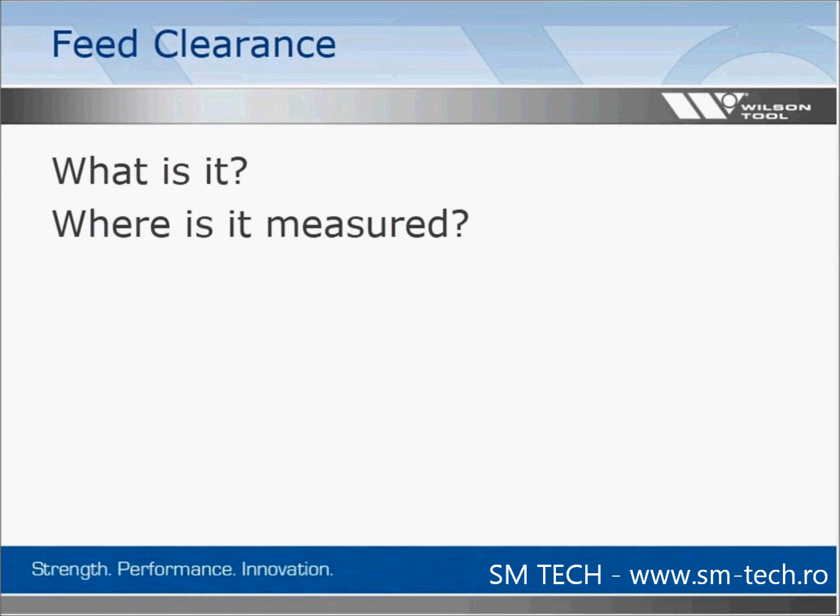Feed clearance, the place where forms happen. For a number of you, that will put an image in your head. For others, you're going to learn what that image would be if you were able to make the transition. Feed clearance, what is it? Where is it measured? And what's its role in production planning? That's what we'll be discussing today.

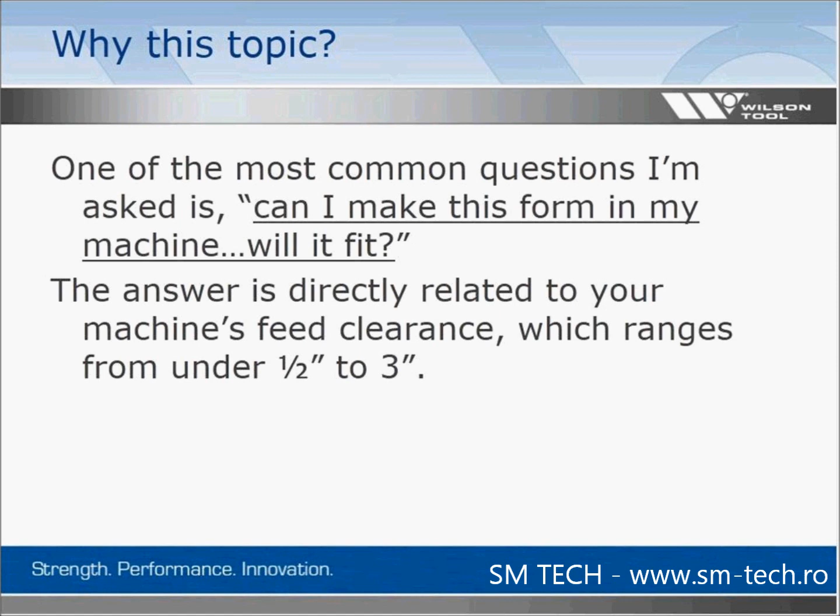But first, why this topic? One of the most common questions I'm asked is, can I make this form in my machine? Will it fit? And to understand if it'll fit, we have to understand what feed clearance is. These feed clearances range anywhere from under half an inch to 3 inches, so different machines are going to have much greater abilities than others. But to answer the question, we need to know what this is.

Understanding feed clearance is also going to give you an ability to make decisions that affect your quotes and how fast you can do a quote. If you don't have to contact someone at Wilson Tool for a question like this, it's just going to improve your quote turnaround time.

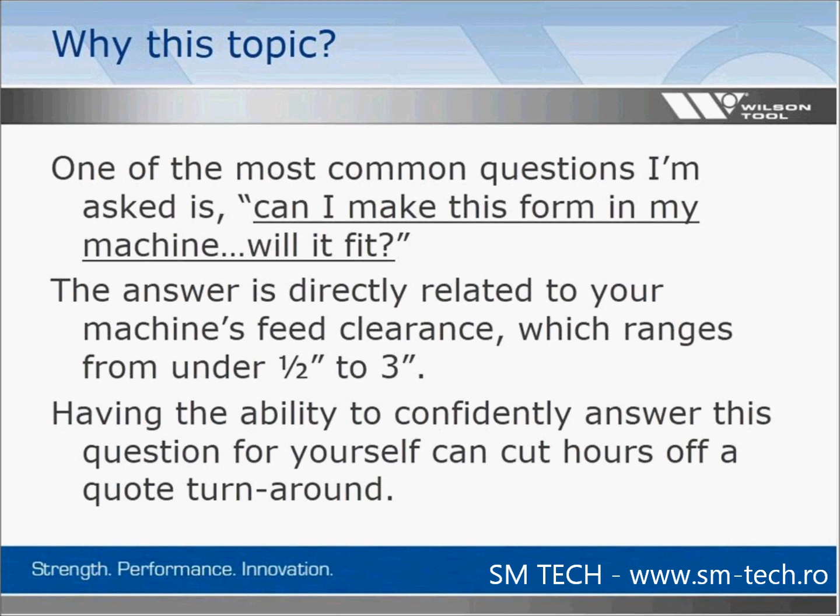So feed clearance, what is it? It's the machine's allowable workspace. So it's the area in which your sheet and the forms are created and travel about.

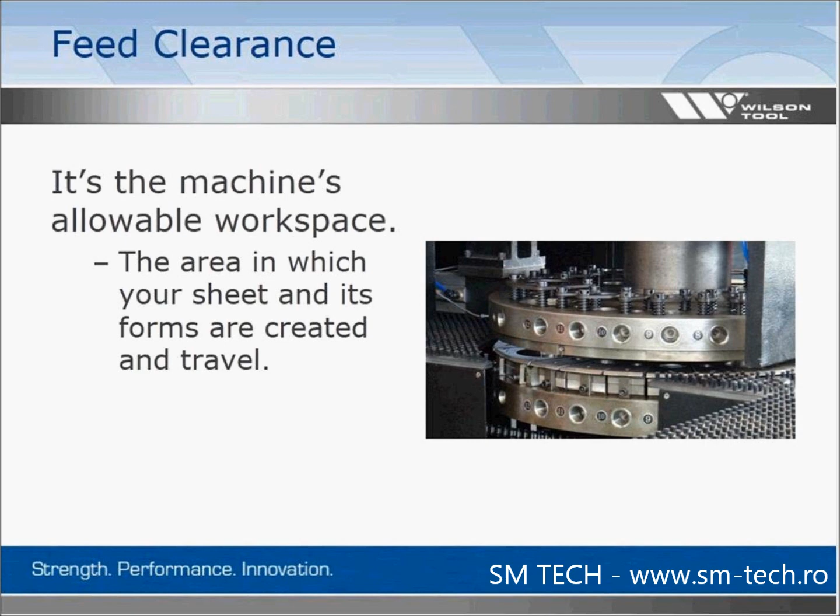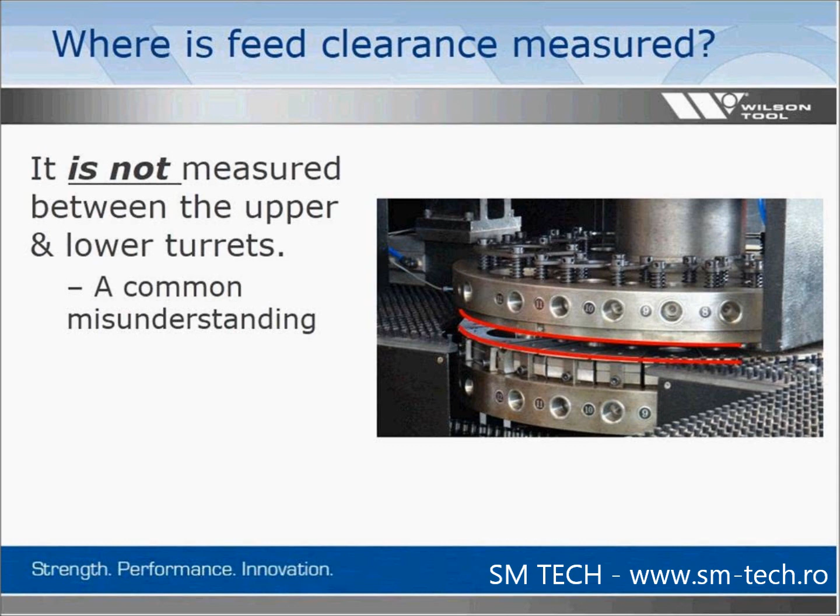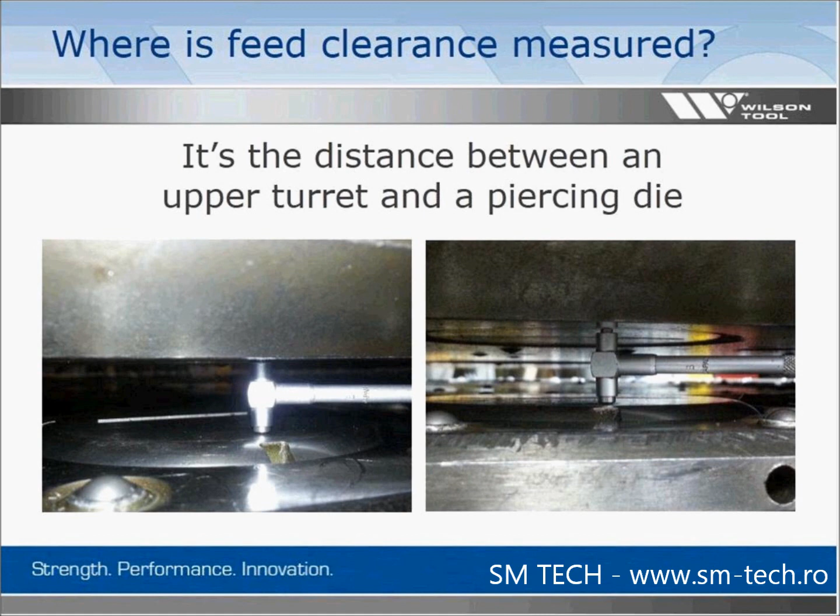Where is it measured? Well, it's not measured between the upper and lower turrets. That's a common misunderstanding. Right now you should see some red lines flashing about. It's really not there, because on this next slide, we'll see how a piercing die sits above the lower turret. So the distance we're talking about is from the top of a piercing die to the upper turret.

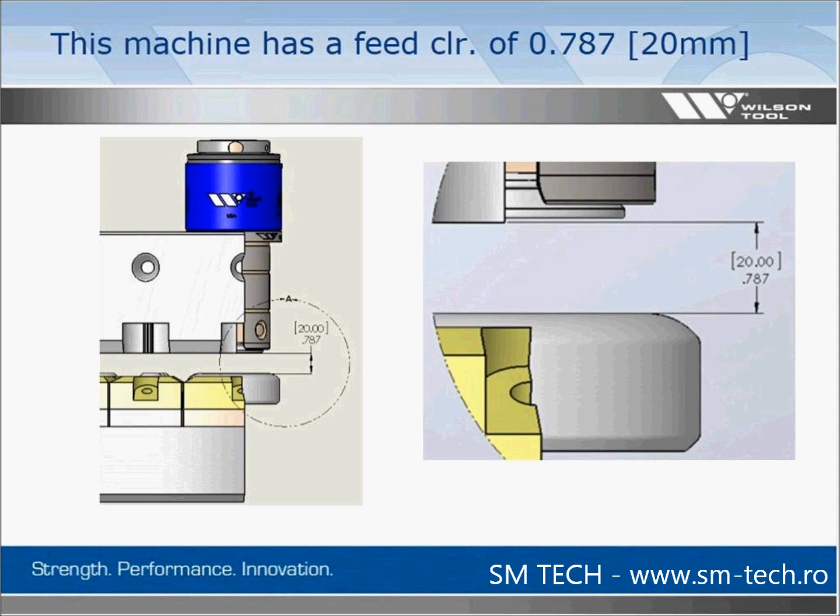This particular machine's feed clearance is .787 inches, or 20 millimeters. If you notice in the right-hand image, the stripper plate is slightly recessed into the machine. And that's why we don't measure to the upper tool, just the lower tool.

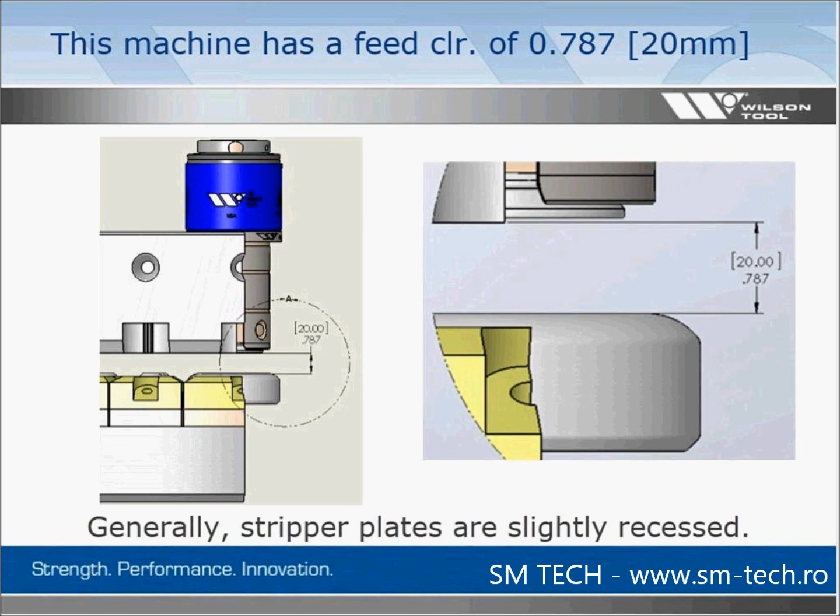So what's its role in production planning? It's used to check whether or not you can make a form in the punch press, right? We're answering that question: will this fit?

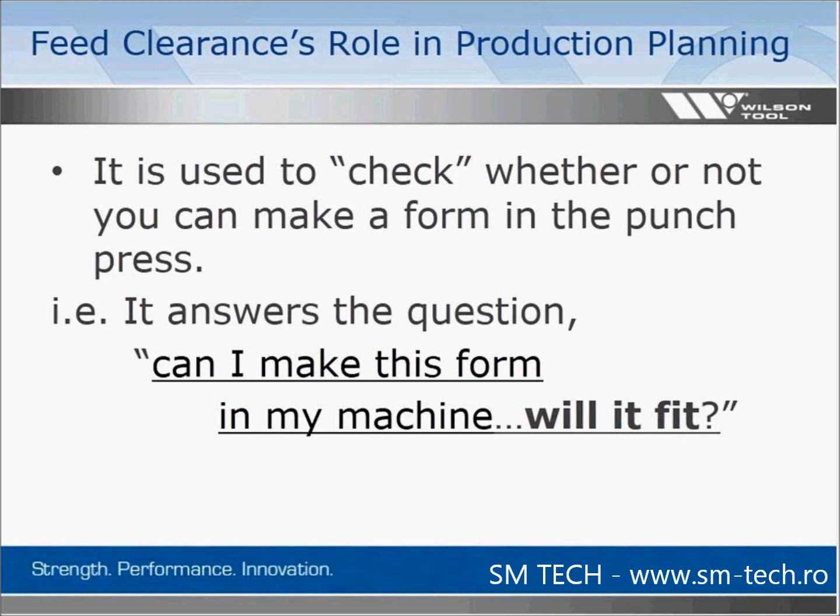So a feed clearance must accommodate the safety factor. We have that workspace, but we can never use all the workspace up, otherwise our sheet's going to run into the machine. Something bad can happen.

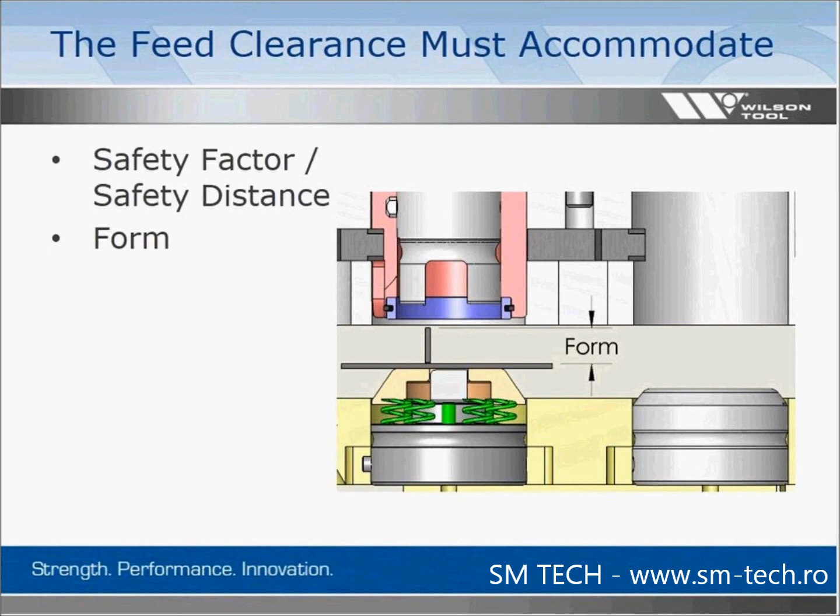We have to accommodate that form itself, sheet stock, and the taller die. When we're doing forms, we have to have taller dies, we call that add-on, that sit above the piercing die in order to make the form. Sometimes we have strippers that hang down because they're extra thick and they have to have relief for forms, side to side, center to center type information. So sometimes we have to account for that stripper as well.

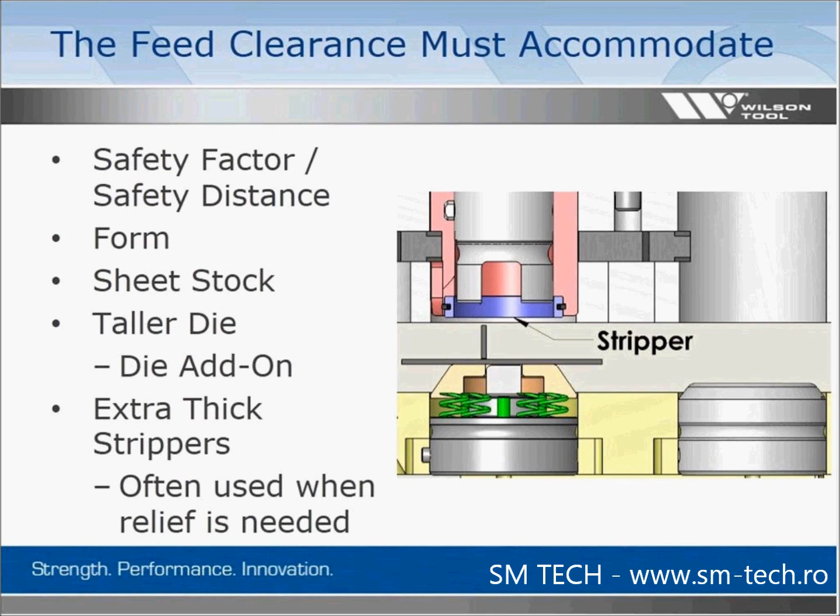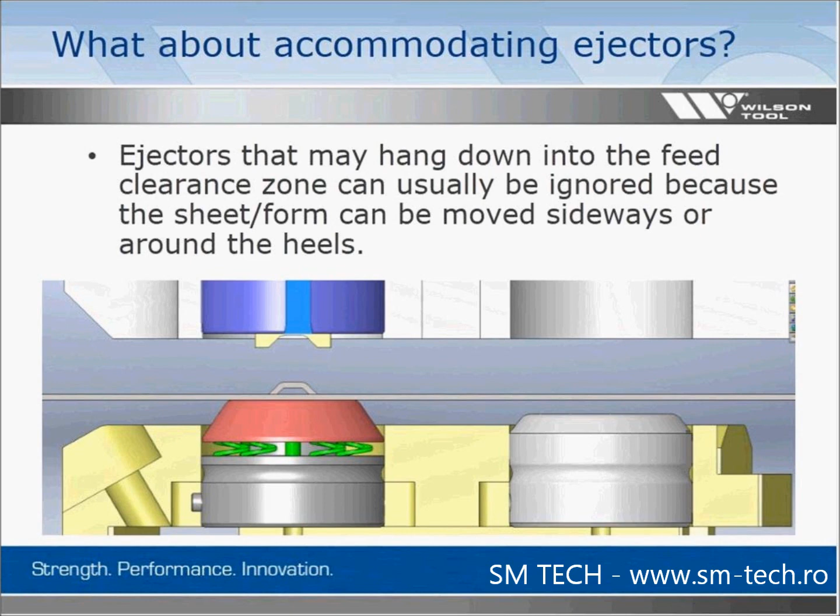Some people might be wondering why, or do we have to accommodate ejectors. In this picture, I'm showing how the upper ejector hangs down below the turret. Now, yes, it hangs below the turret, but from a practical standpoint, we can ignore that because the form can usually be removed from beneath the ejector by sliding in one particular direction or another. So to get the most out of your machine, sometimes you just have to program around some of the problems.

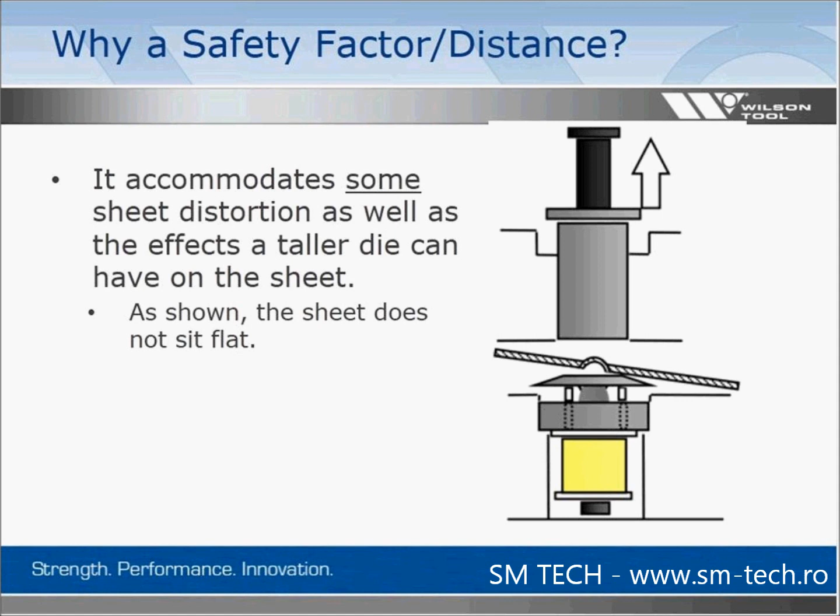Why is safety factor distance needed? As I alluded to, if we used up all the space, the sheet can hit the turret, bad things can happen. But sometimes the sheet just kind of bends. In this picture, you see how the sheet is kind of cocked, extremely exaggerated because it's a forming tool. So we have to account for that, give it a little extra safety space. And then there's just the overall sheet distortion. So we got to accommodate those sorts of things.

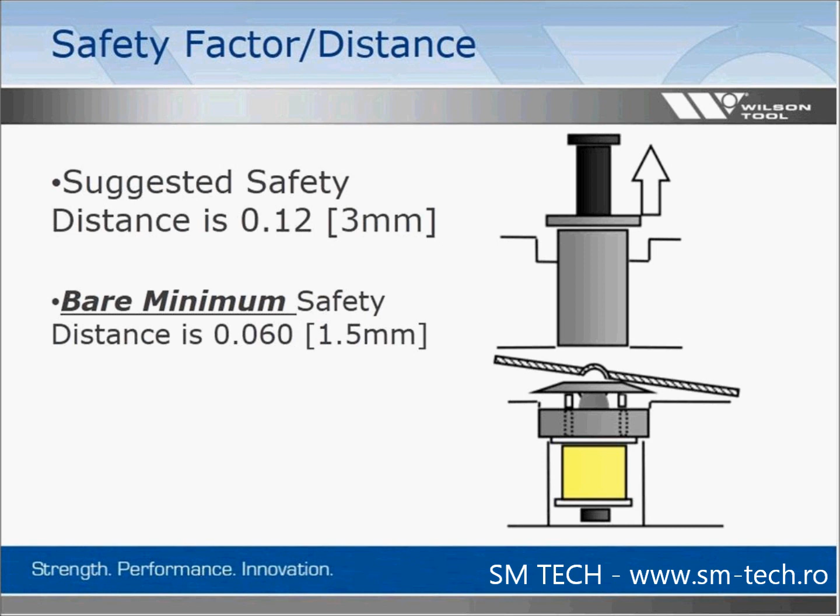The suggested safety distance, or safety factor, that I'm suggesting you use, because we are going to do a little math, is 0.12 inches or 3 millimeters. As you get more comfortable with your product and with making these calculations, and you find you're very successful and comfortable with your calculations being pretty accurate, you could cut that safety factor down to probably about 60 thou as a bare minimum.

Now, there are some special machine functions that overcome this problem with the sheet tilting. In a Finn Power machine, they call it a retractable die station. In a Trumpf machine, they call it an active die station. Or in an Amada machine, they call it the forming station or punch and forming station. There are many other manufacturers, and they all have similar functions.

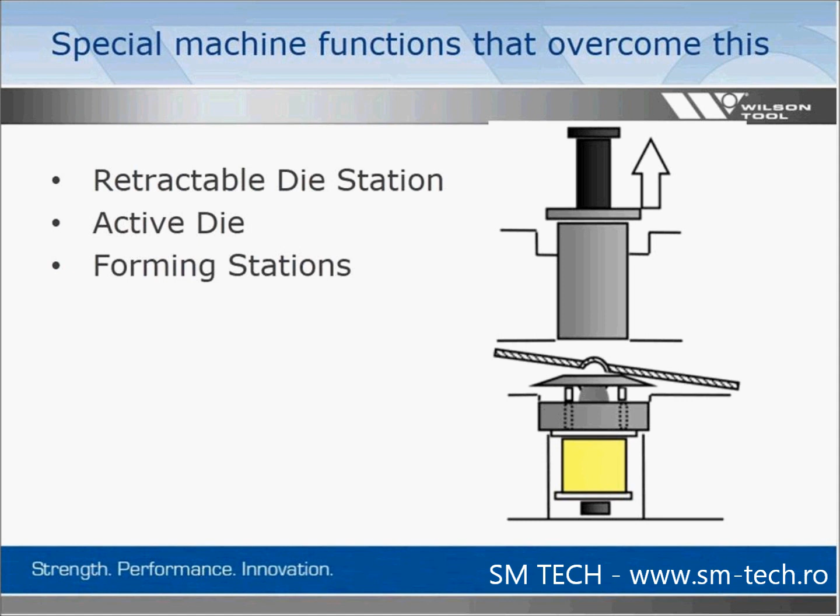So we're going to take a little sidebar to show you the value in these forming stations or retractable systems. The whole concept is to keep the sheet flat, so it doesn't tilt up when you're using a forming tool. In this image, we're seeing how the sheet is positioned above a forming tool, and it happens to be at the same location as a standard piercing die.

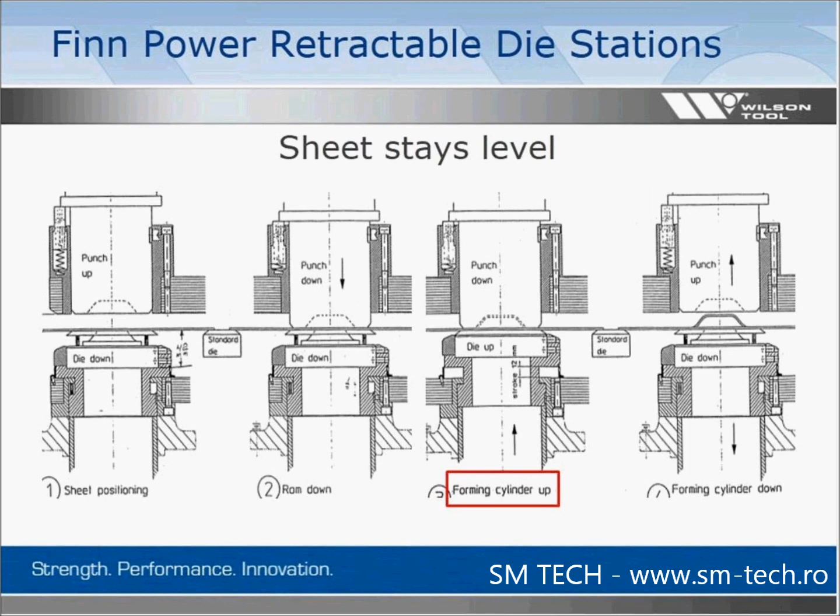So the machine's going to bring the upper punch down. The sheet didn't move anywhere. Next, the lower forming cylinder is going to move up, traveling the forming die upward into the punch. But notice how the sheet's not moving, it's not going anywhere. And then everything retracts. So you did all your forming with a flat, level sheet.

Trumpf's active die system is very similar, where they're going to bring the punch down, engage the sheet, and then lift that die system up, activating all the action in it, and then retract everything. The sheet stays flat.

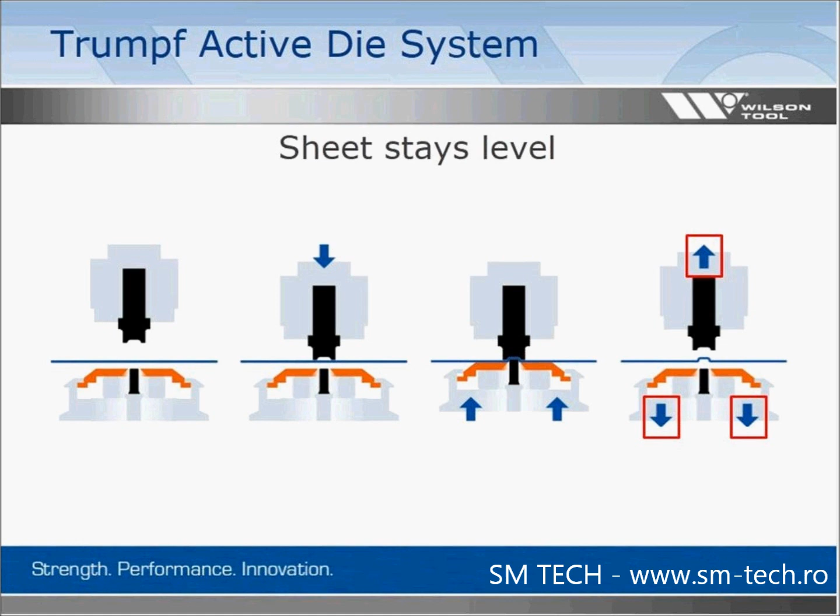The last one I have here is the Amada P and F. This one is different than the other two in that only the internal portion of the die moves, not the whole entire die assembly. In this case, we can bring our punch down, securely holding the sheet, with as much as 30 tons of pressure, where the other ones are just holding it with whatever spring pressure we allowed in the die assembly.

When the upward cylinder moves, we make our form, and then everything retracts. The sheet stays level in this case.

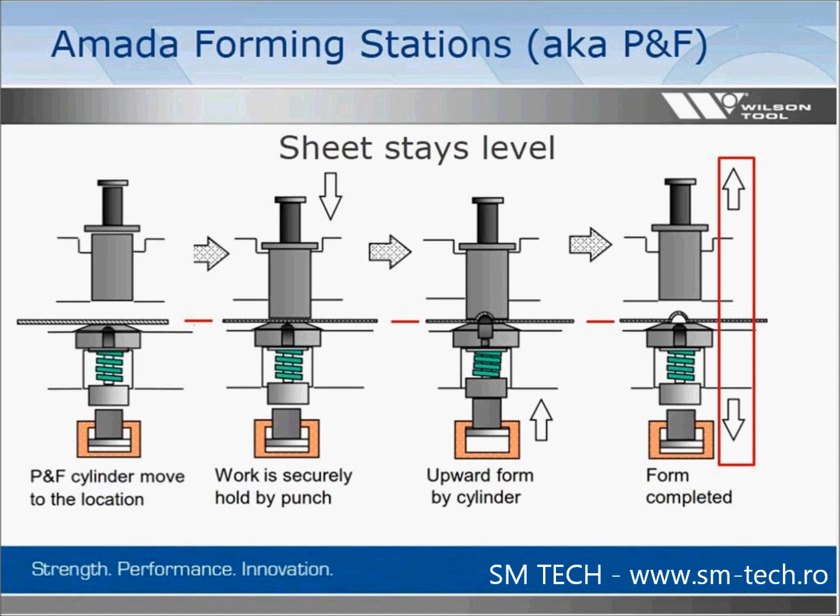I just encourage everybody, if you have these systems, you should investigate using them. You won't regret it, and the quality enhancement is something you can sell. We have customers who make nothing more than electrical knockouts, and with the Amada P&F system, they just make them better than everybody else. The quality is greatly enhanced.

So back to our topic, what's the role of feed clearance in production planning? Well, feed clearance needs to accommodate everything, right? We said the safety factor, form, sheet stock, taller die, and the extra thick stripper.

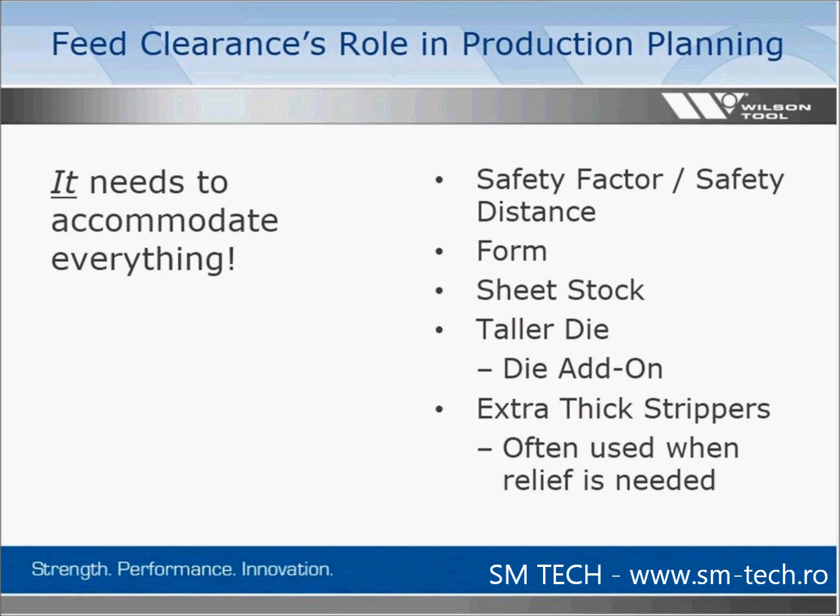So the taller die, that die add-on, let's just make sure everybody knows what I'm talking about. This picture shows you a forming tool on the left and a piercing tool on the right, and the add-on is how much taller that forming tool has to be to create a form.

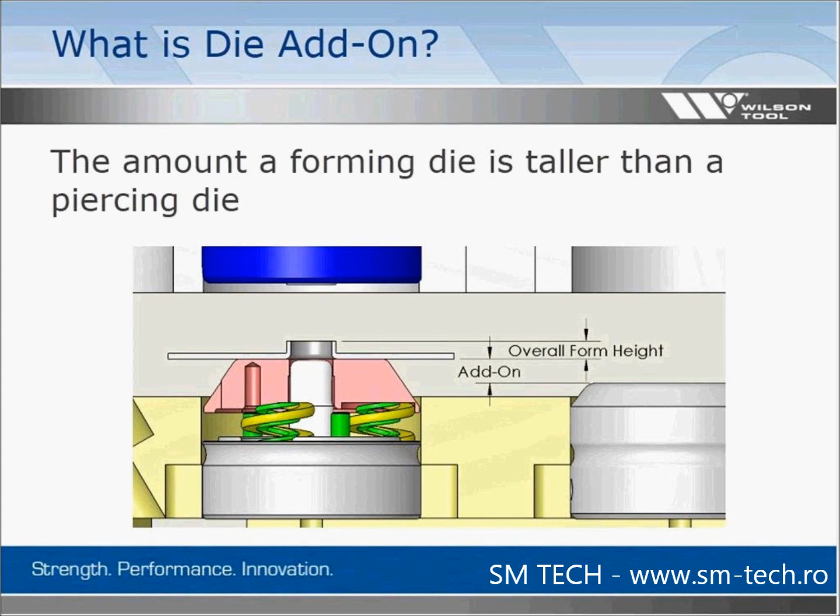So now, how do you know what the die add-on is? Most forms fall into 3 tool designs or categories, and that's directly related to the add-on. There's no standard verbiage or names for these types of forms, so I'm going to call them positive forms, pass-through forms, or wipe-up 90 forms.

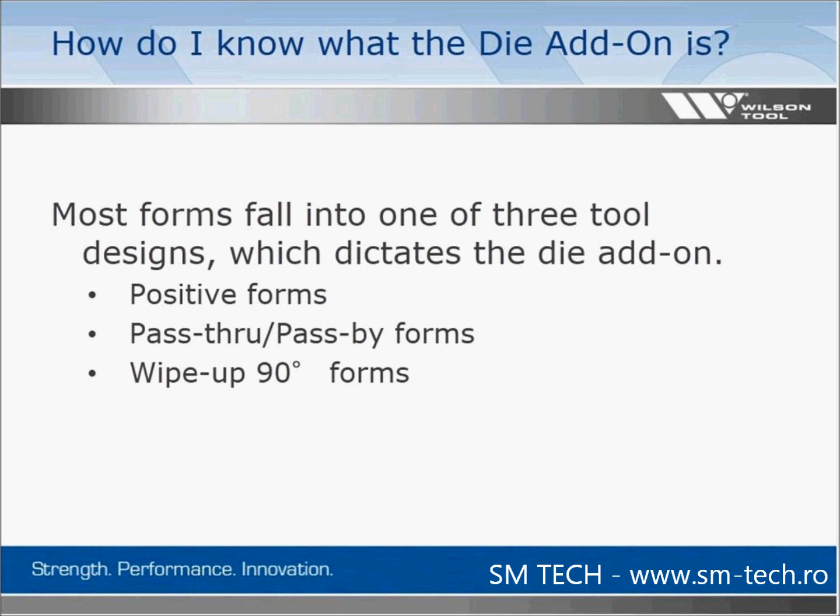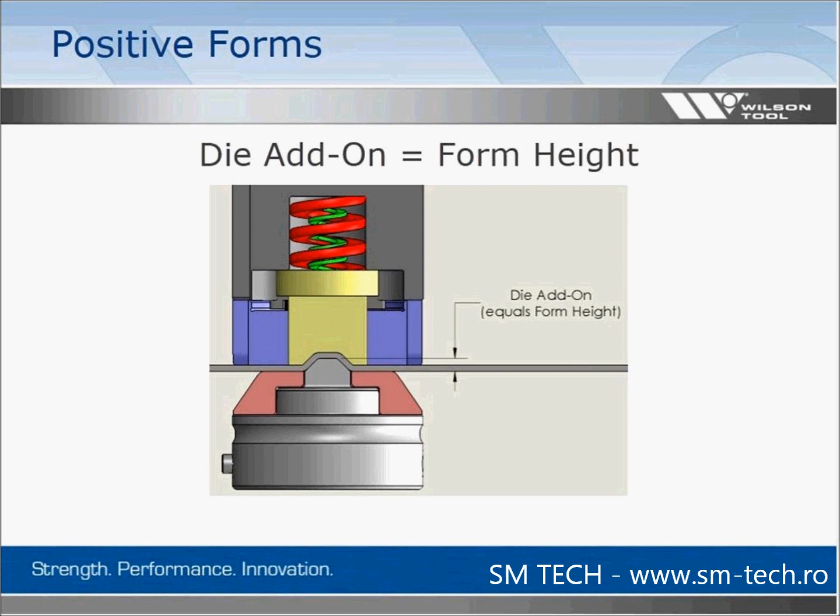Here I'm showing you a positive form. The die add-on equals the form height. It's a bridge, or it could be an emboss, where that die add-on and the form are identical. So it simplifies our math problem. The minimum feed clearance of a positive form is a safety factor plus 2 times our form height plus a material thickness. You can see with the graphic why an add-on equals a form height, so that's why we see 2 of them plus a material thickness. That's all we have to accommodate.

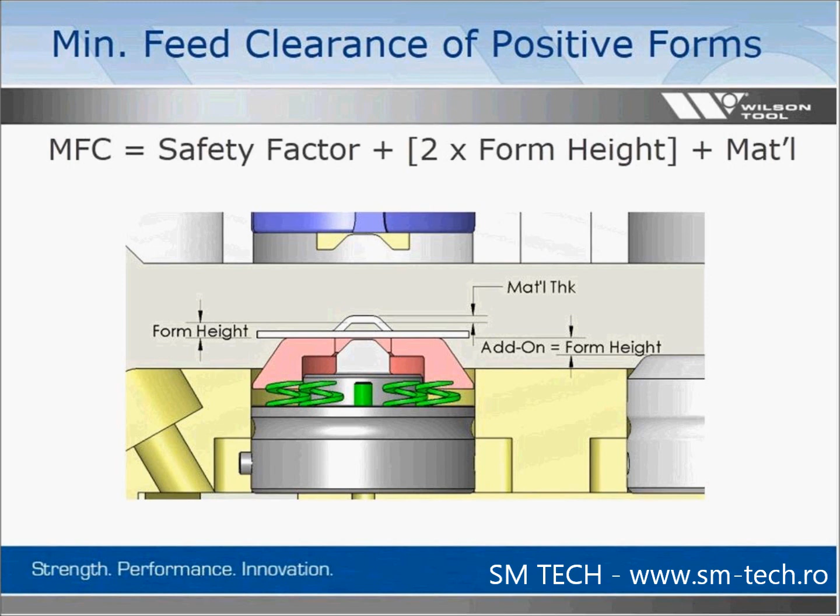Other positive forms, or the group of positive forms, are bridges, embosses, EKOs (electrical knockouts), dimples, half shears, lance forms where they're that up and over, louvers - that's most, rare cases we can shorten it, but for the most part you can count on a louver being a positive form - ribs, thread forms, wheel tools, those are all positive forms.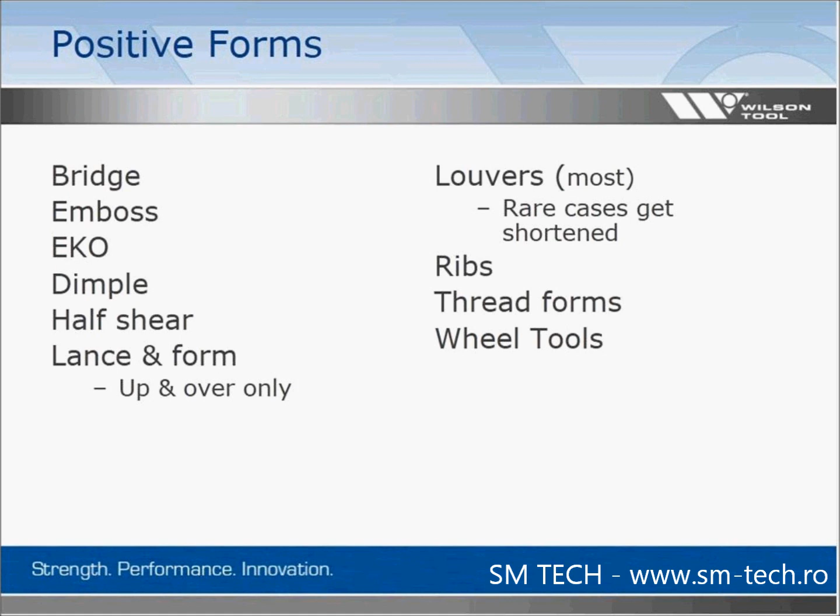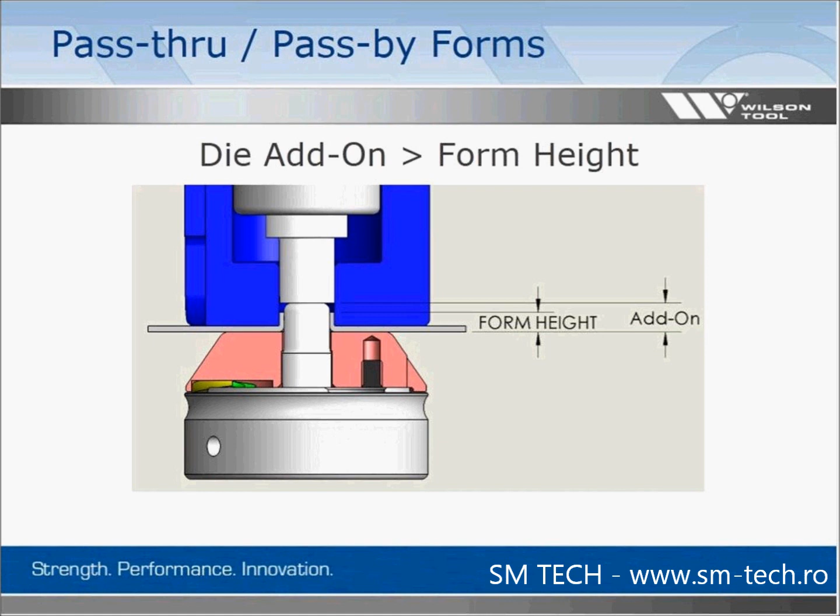Now, a pass-through form or pass-by is where the die add-on is going to be more than the form height, because in this case it's showing you an extrusion, and I have to shove the tool completely through the extrusion.

But using some rule of thumb, some common sense measures, we can identify that the radius on a tool should be approximately a material thickness. Sometimes a little bit more, sometimes a little bit less. But it's safe to say one material is going to be my radius. So if I do that, my die add-on becomes my form height plus a material.

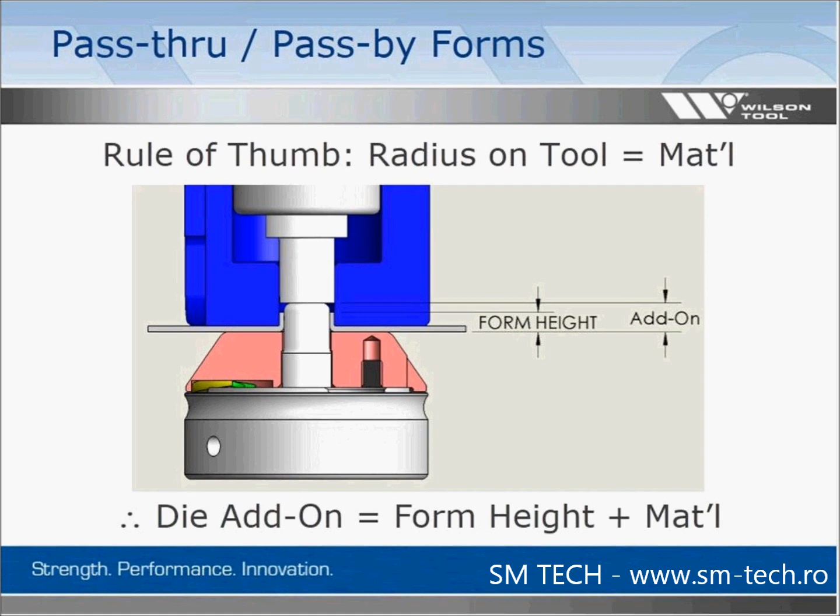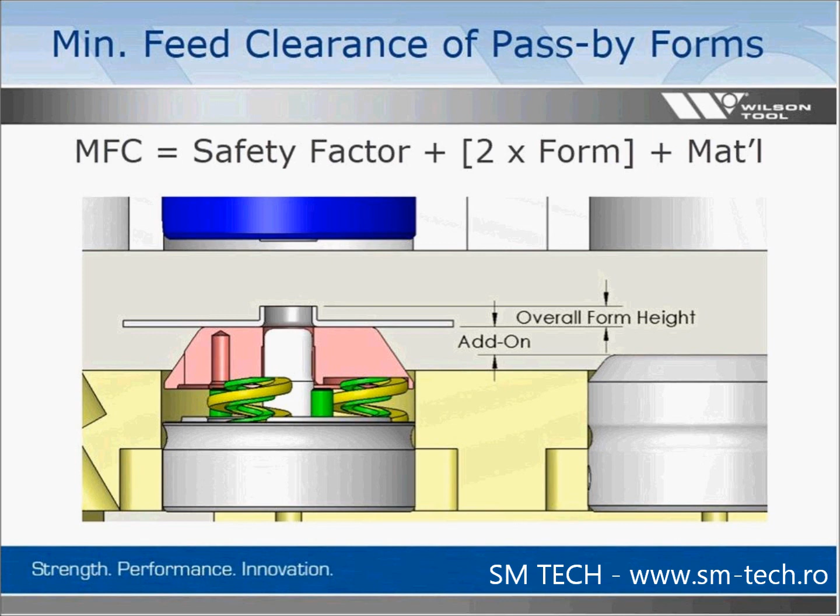And then to take that to what is our minimum feed clearance, it becomes that safety factor that we always want to use, plus 2 times the form, plus a material. So with a couple general rules of thumb and simple math, we can answer the questions.

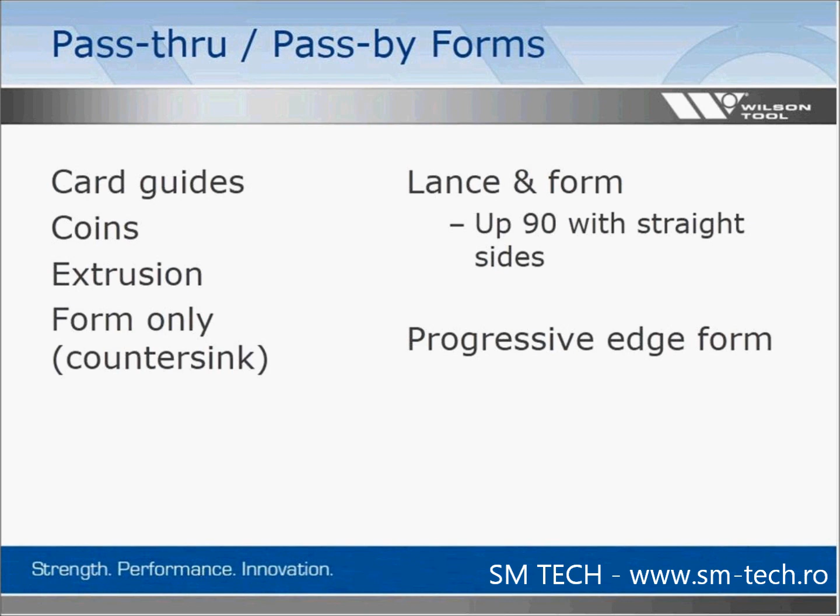A pass-through form would also include card guides, coining tools where we have a pilot, extrusions, form onlys or countersinks, a lance and form, up 90 with straight sides, progressive edge forms. I'm sure there's a couple that I missed.

Now, a wipe up 90 is a category by itself, because as you see, the die add-on can be much less than the form height. Since I'm not cutting the sheet and forming it, all I have to do is kick the form up. Doesn't require me to pass beyond it.

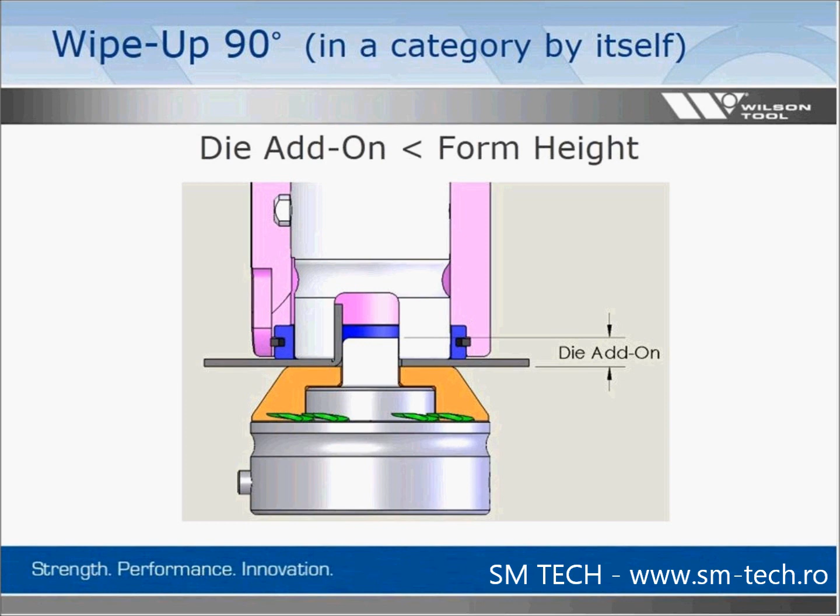Wipe up 90, we have that rule of thumb again on the die rad. The material thickness is fine. So what we have to accommodate here, we see is a material thickness. We have a bend radius on our punch, a material thickness of straight. We have to have something, make sure we wipe at 90 degrees. So we're going to use a material thickness of straight and a material thickness for that rad. So all those

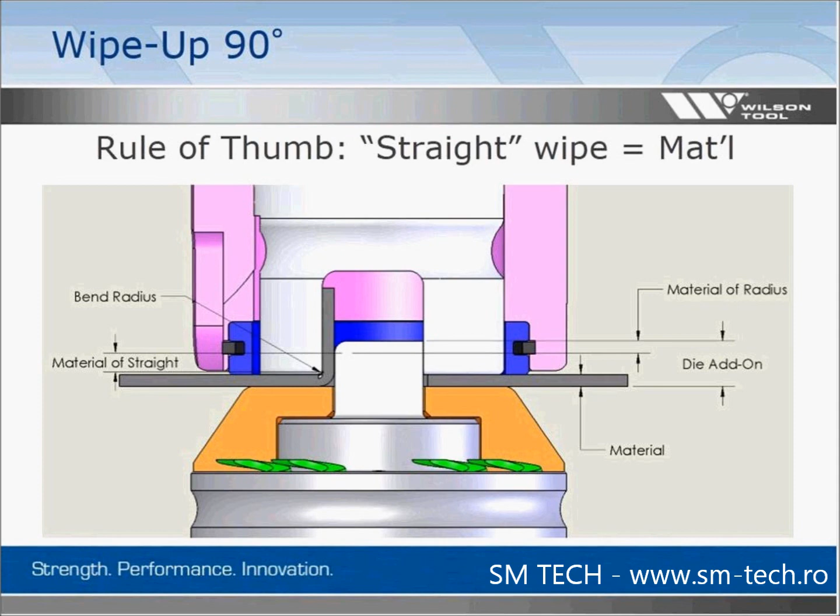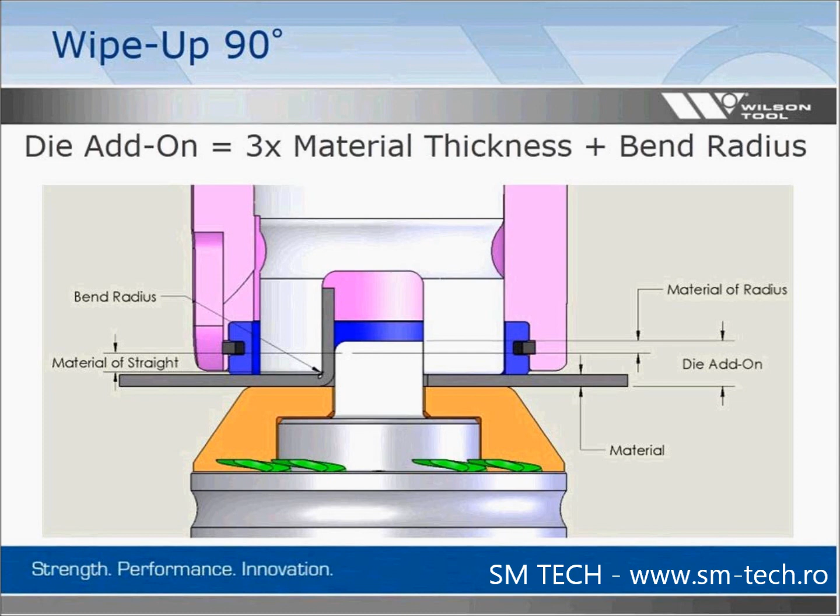create our die add-on. So what I didn't point out is the rule of thumb, straight is also material. So if we can relate everything to a material, it really simplifies the math formula. What's my die add-on? It's 3 times material thickness plus whatever the bend rad is on the punch. That's a variable that I can't put a rule of thumb on.

So our minimum feed clearance of a wipe up 90 degrees. It's going to be our safety factor, plus overall form height, plus 3 times material thickness, plus that bend radius.

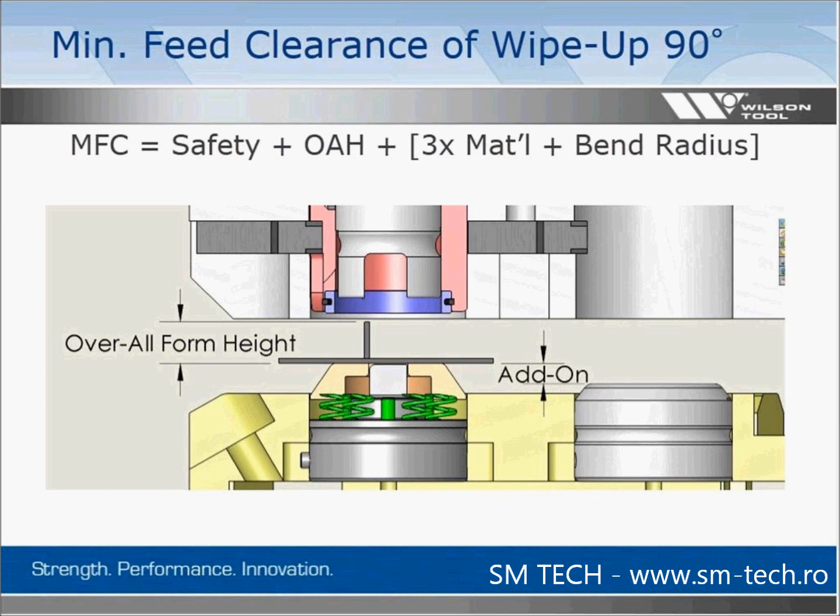So just making sure we're following the bouncing ball, if you will. I'm giving you a little math test. It's not going to be graded, so there'll be no embarrassment.

So my question to you is, what's the minimum feed clearance of this bridge? Now remember, it's a positive form. I have a form height of 130. My material thickness is 60. So remember, we have to account for a safety factor. And because it's a positive form, it's 2 times the form height plus a material.

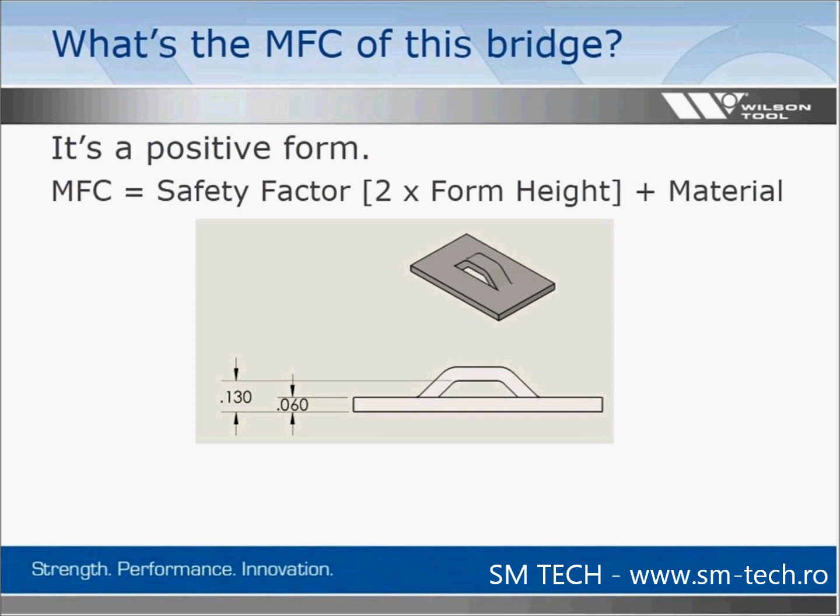So to create the bridge in front of you, it requires a machine that has 0.44 feed clearance or more. And I do know machines on the market that can't accommodate this.

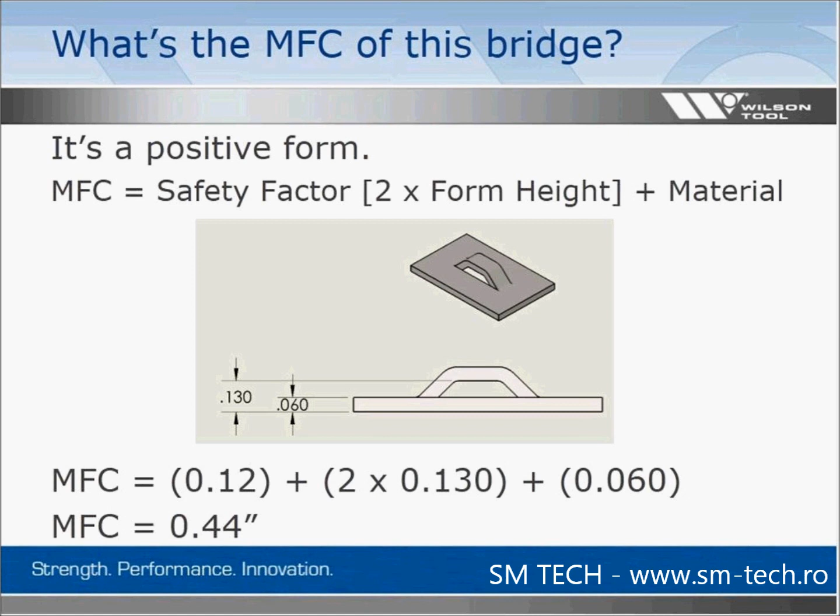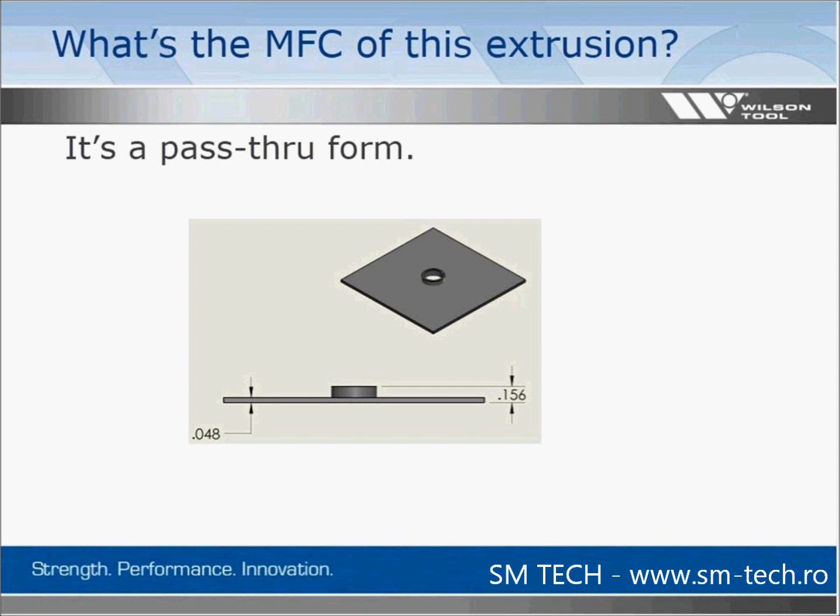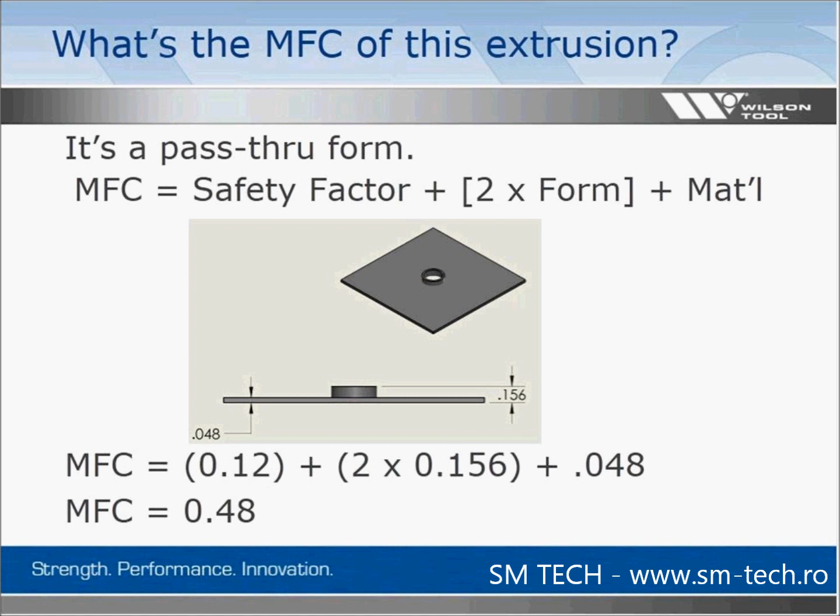Here's an extrusion. What's the minimum feed clearance on this extrusion? It's a pass-through form. It's 156 tall, 048 thickness. So if you remember the rule, the minimum feed clearance is safety factor plus 2 times the form plus 1 material. So here we need a minimum feed clearance of 480 thou.

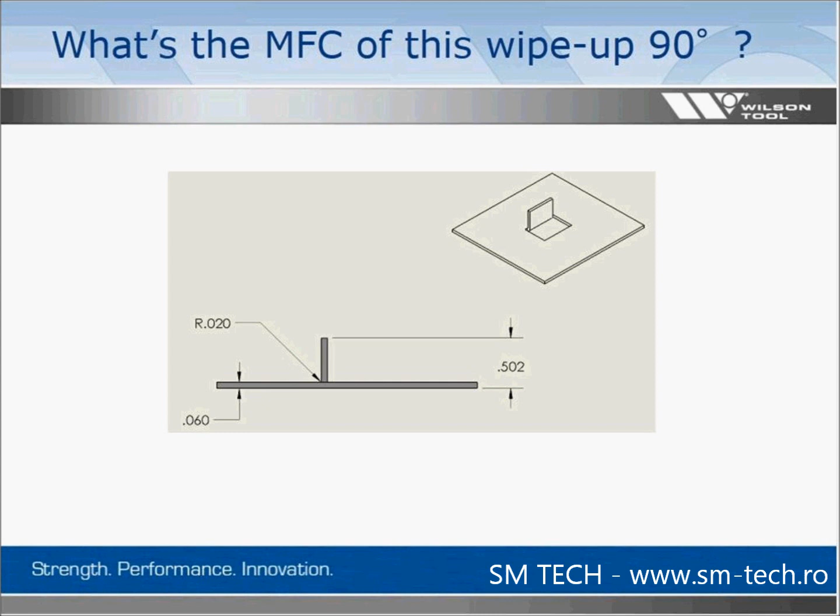Now on a wipe up 90, this one was the oddity, if you will. It's 502 overall height. We have 60 thou for material thickness. We have a bend radius of 20 thou. Remember, the minimum feed clearance is safety factor plus an overall height plus 3 times the material, and the material is for the tool's bend radius, the amount of straight we want to go past of the tool to the form, and then our material thickness itself plus that bend radius.

So here's a case where we can make a 502 form, which a lot of people don't think they can do in their machine. And the result, it needed a machine feed clearance of 822 thou. And there's a lot of machines out there that can do this.

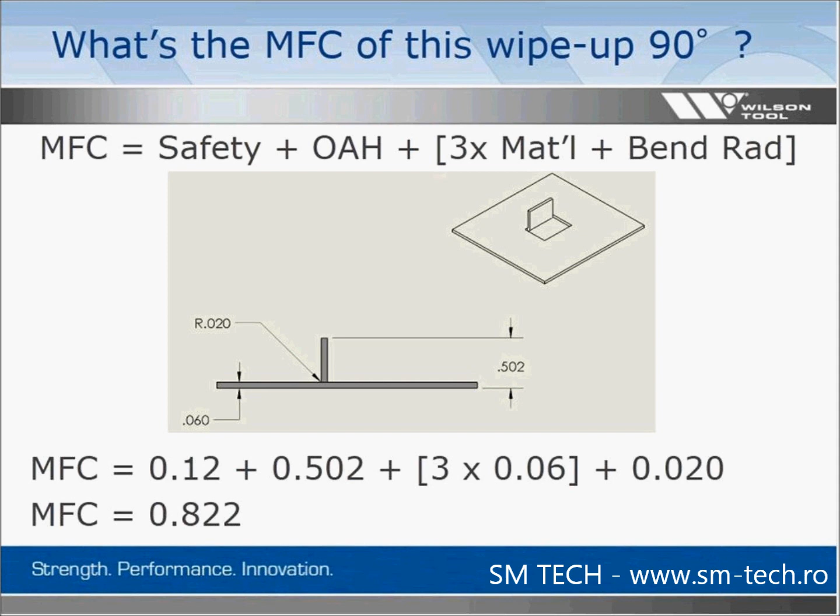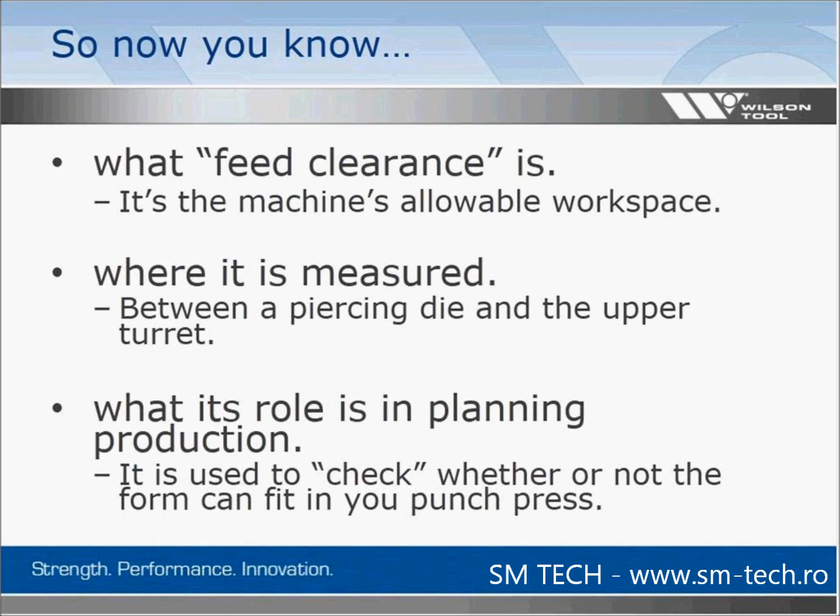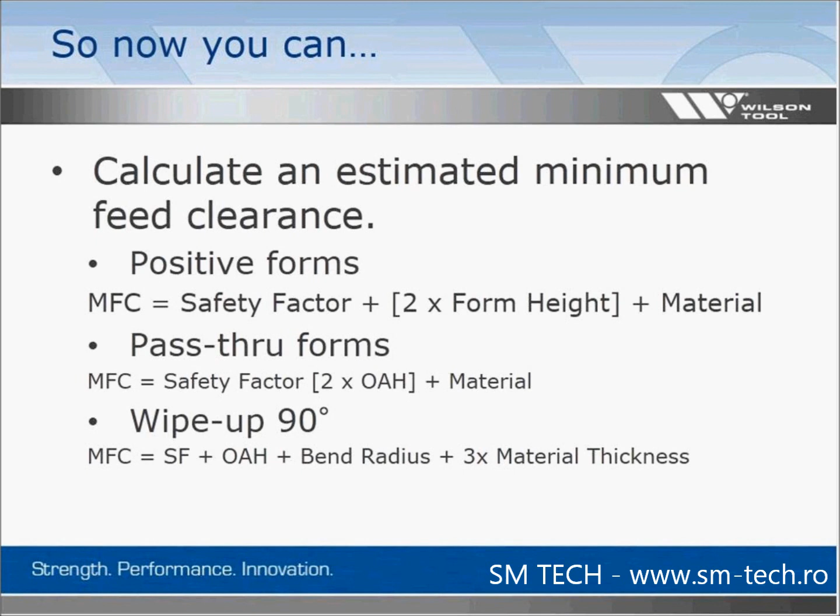So now you know what the feed clearance is, you know where it's measured, you know the role in production planning. You can also calculate the estimated minimum feed clearance because that's your check and balance. Here's your simple formulas to refer to. And that's going to allow you to determine if your machine has the physical capacity to fit the form that you're trying to quote.